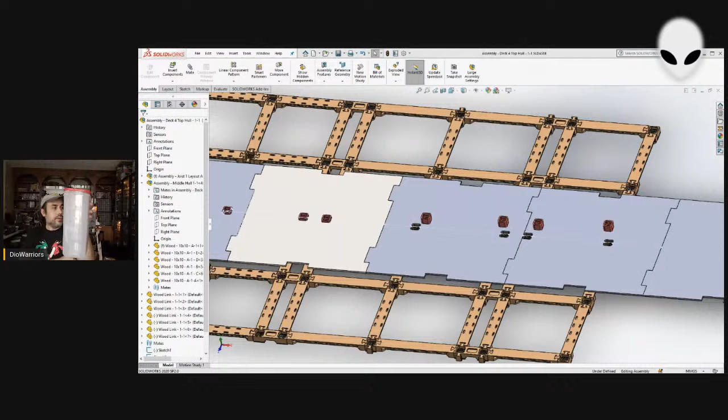But something like this will keep the filament dry from moisture, and I can use some silica gel and just keep it at the bottom. The silica gel will help keep the filament pretty much dry. And these are pretty small and slim, so they should fit right next to all my other printers without taking up a lot of space. So, anyways, that's the battle plan.

So what I'm going to do right now is work on the roof section of my VSS. This is just part of it, and once it gets to a stopping point, then I'll switch gears and work on the box. I'm not quite sure what I'll do for that box, but it should be something simple, so I'm not going to spend a lot of time on it. We'll see how it comes out.

So I'll switch windows to the VSS02. What you'll see here is going to be the joisting part. It's only half of what I have to do for the upper deck, so what you see on the screen will be for twice as long. What you see right now is only half of it.

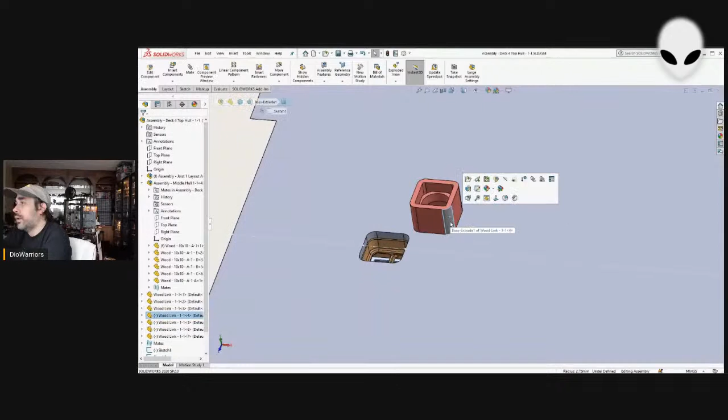So what I'm doing, basically, I'm making these square sections. They're kind of like a big peg, and they will go through the wood to anchor it to the joisting structure underneath. This is the structure underneath. All these points here is where it'll come in contact with a bulkhead.

I'm not sure about the center pieces, since I want to keep the middle parts as clear as possible. If you're curious how strong these things are, I have one segment printed.

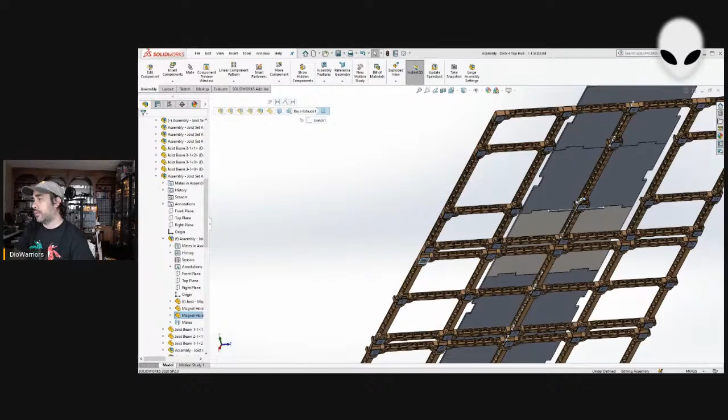Let me switch, so let's see. It's this section here. It's very tight, and there's no glue right now.

I can easily imagine when I have more than one put together, it will be quite rigid. Plus I have connection points where I can add additional structures. Either I can reinforce a wide section, or I could just attach a simple section there to reinforce this from sagging or bending if it does.

So I've got to print a whole bunch of these things, and that's what this printer is currently doing. I have it really slow, but it needs to increase speed. I'm slowly incrementing speed on that printer, mostly because it's printing directly on the build plate, and if it does it fast enough, it'll make the underside of the build plate kind of ugly.

I'll give you an example. You can see, even though it's blurry, you can see some... oh, come on, focus.

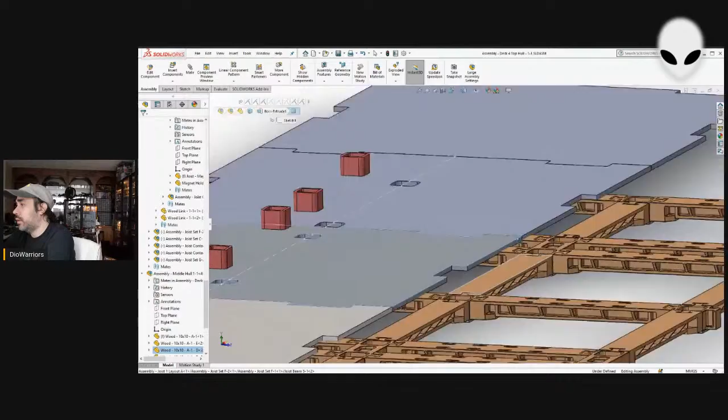And it will - I'm going to try to use. I just noticed something, oh okay, never mind. I'm going to try to use. Yeah, I wonder what's going on here. I'll figure that out later. Should be. Oh, I know why, okay.

So anyways, yeah, I'm trying not to use glue everywhere. I'm trying not to rely on it too much. What I am going to try to rely more on are things like pegs - a peg system to help keep pieces from shifting around.

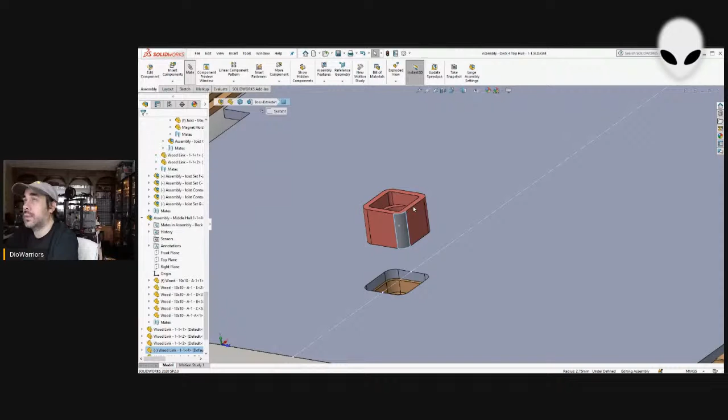And so, as you've seen me in other videos, I'm just mating these pieces together. It takes a little bit of time, but fortunately I don't have a whole lot to do before this section is finished. Just gotta do this - right now it's fairly easy.

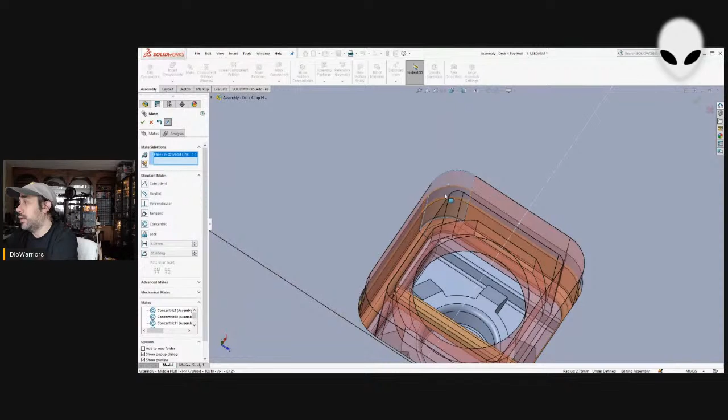I did some changes on some other parts earlier this morning and yesterday, and that took a bit of time. It was a bit frustrating at certain things too - frustrating where I make a change and it causes me to have to update a whole list of other things. Then when I update all these other things, I find that other things have been broken, so I have to go back in and reconnect those. It was just getting frustrating, but I finally got things done.

On the printers to my left, I'm working on some orders. They'll be going out tomorrow.

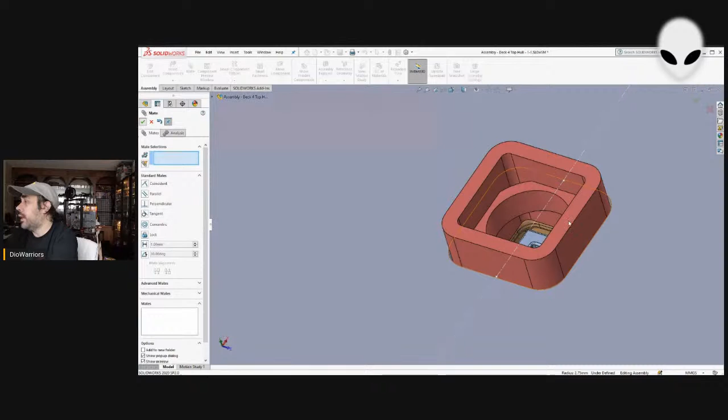So yeah, it's been raining outside, and it's been raining kind of hard.

So I have almost everything done on this. I now have to secure the bottom parts, and it gets a little bit tricky. Let me move this further up. The reason why it gets a little tricky is that there's a whole lot of details with the joisting.

There's a lot of different surfaces, and that can tax the computer as I move things around. Okay, got everything almost done, let me go back and mate. Okay, there's also a potential problem area here - I'm not too sure, and I'll tell you about that in just a moment.

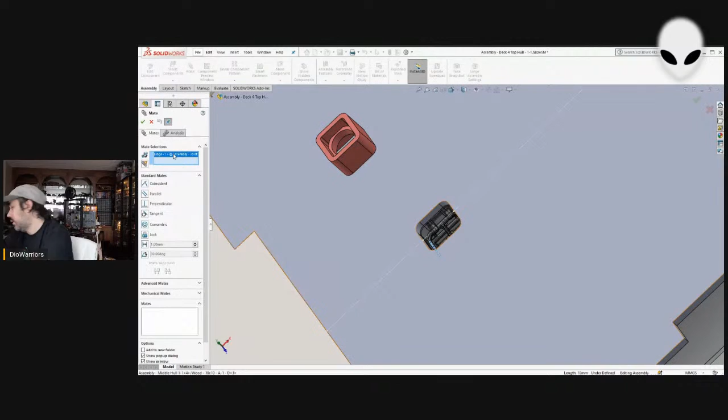This is not what I want to do like this. This to here. Okay.

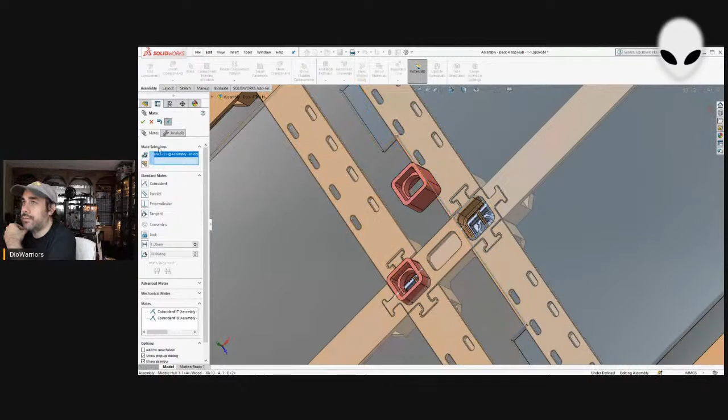This side to inside here. And this is the problem area. It's just so close to the edge of the wood here. I might make an alteration between this piece of wood and this piece of wood.

For example, maybe I need to remove this section, this tab-like section here, maybe reduce it or something. Anyway, it's so close to the edge, it's only 0.33 millimeters spacing, which is basically nothing.

So it has the potential of breaking. So I'm going to try to remedy that.

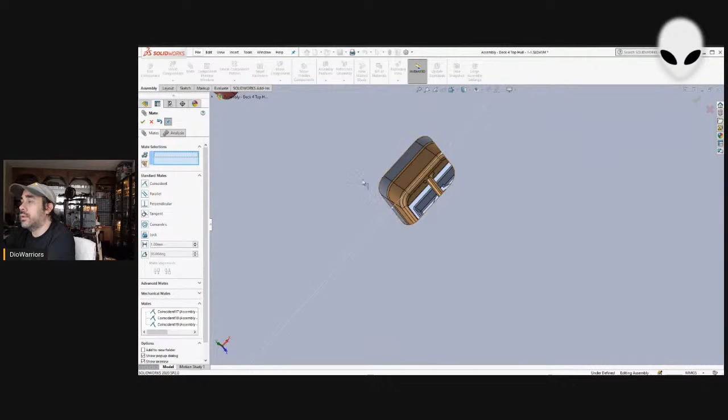This is only one layer of wood. All this gray, or actually this color tan, it's only a thin piece of wood. So I'm thinking of putting other pieces to kind of stagger them and reinforce the seams.

But you know, all that adds weight, and when you put multiple pieces of wood, it's going to get heavier. So I have to make certain pieces stronger, and that increases the chance of sagging, things like that. So there's always this tug of war, a seesaw type of effect to balance everything.

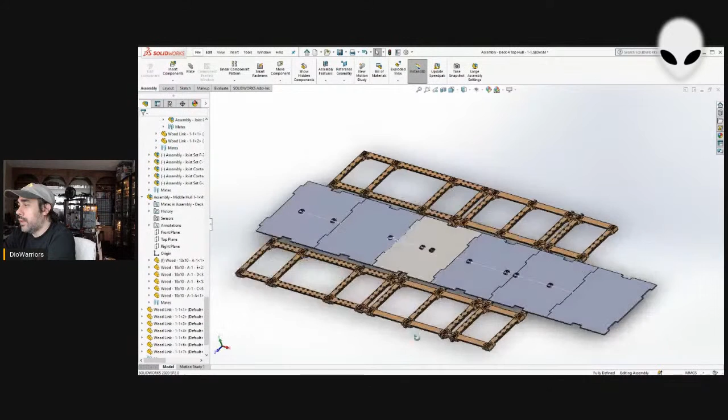Okay, I think I'm done with this part. Let me change the view.

All of these pieces have these peg holes or port holes. I need to do them for these pieces of beams, of joisting, and just that, I haven't done it.

There's a lot of stuff I got to print. What you see here, these smaller pieces, is the stuff I have already printed. So I got to do a bunch of these.

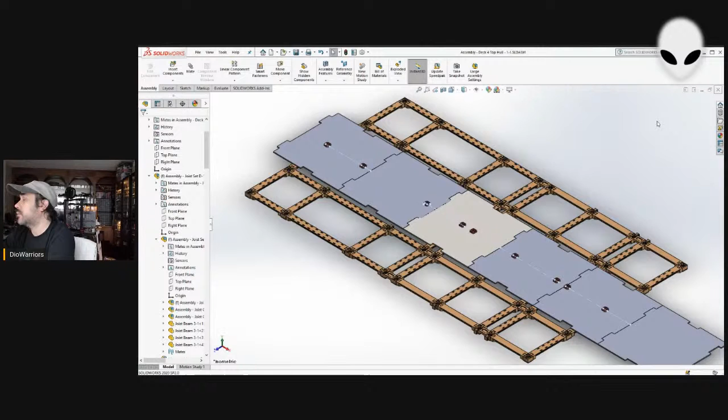So let me go back and get into a nice view so I can save it. Save. And just wait for the thing to save. Okay, and I can close this. Come on, close. Okay, that was it, huh?

Let me also bring up something I was curious about. How come it didn't keep the color? I changed a lot of that wood showing up in gray to a tan color, like here. But for some reason it just appears gray in that other file, so I don't know why. It shouldn't have.

So okay, if you're curious to see how that ceiling looks, let me see. I'm going to go to deck 4. I'm going to take a quick look.

Deck 4 assembly top hull. Well, let's take a look at this real fast. Okay, so here, this is how it looks with the joists.

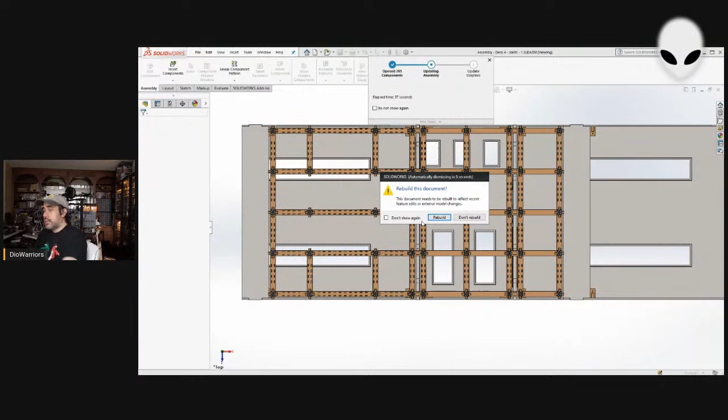Rebuild. No, almost. Well, okay, don't know why I moved things around. Oh, it's upside down. How did that get upside down?

A lot of things are. Huh, okay, I'll just delete this. I'll delete this. I don't know what these other ones are for. Anyway, so let me just rotate it.

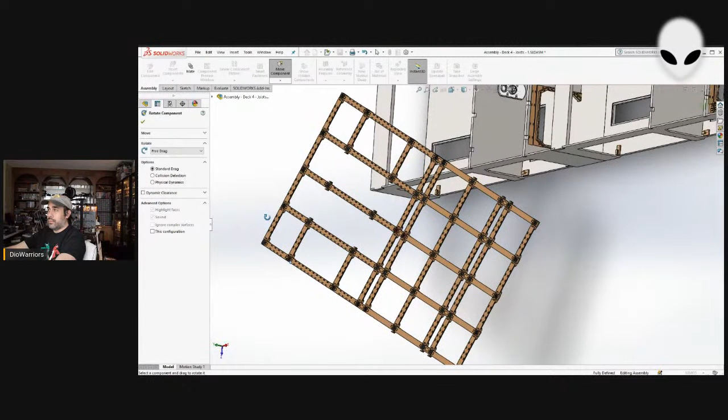It's a free rotation, so it just depends where I grab it.

That's good enough. The rest I could straighten out through the mate feature. For example, I select this surface there, and I say, okay, I want to mate.

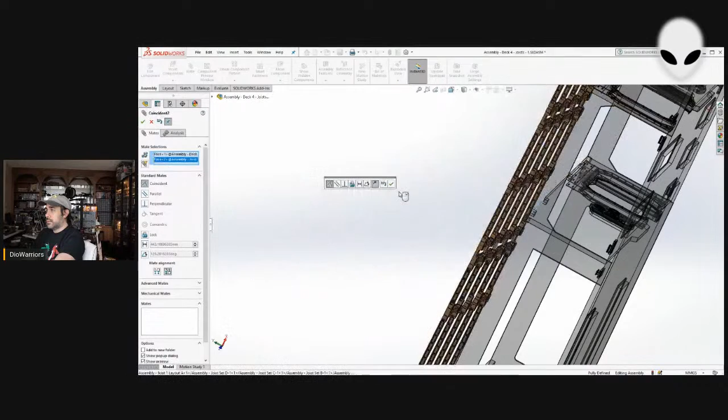Come on. So let's say right about here. Okay. Now I'm going to... oh, I kind of lost the view. Okay, better.

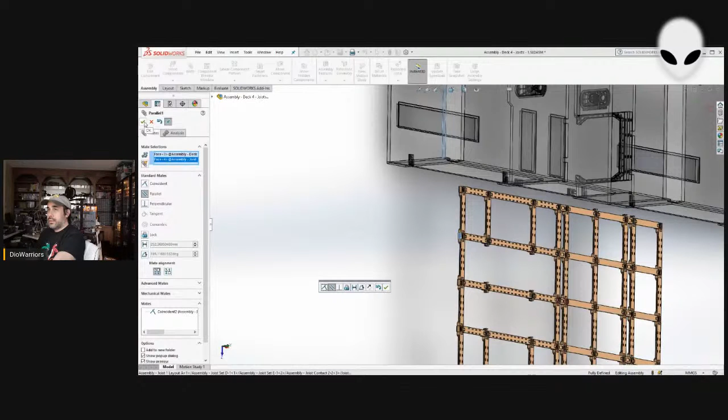All I want to do here is just make this parallel to, let's say, right about here. Okay. And top view.

So this is just a quick little layout test, nothing final. Okay, so this piece here, all this is a wall.

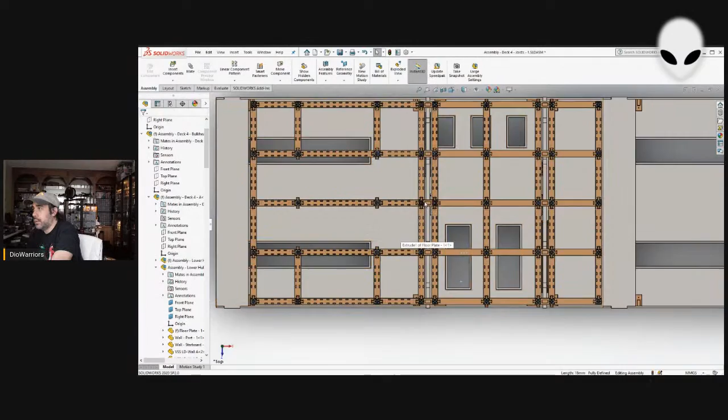So it's a vertical wall, and it's pretty strong. So the idea is I'm going to have this joisting structure resting on that wall. And I'm just going to approximate how far, so something like this. Of course, it's not quite centered or anything, but it gives an idea.

So on this structure here, there's going to be, as you know, the ceiling is going to be on this. It's going to extend all the way to the engine room area. It's going to have another joisting structure over here as well. On the upper hull it's going to be reinforced, and I'll have the flight deck over on this half on top of the upper hull.

And let's see, so I need to put some more pieces in between, some more beams, joisting in between. But this should work.

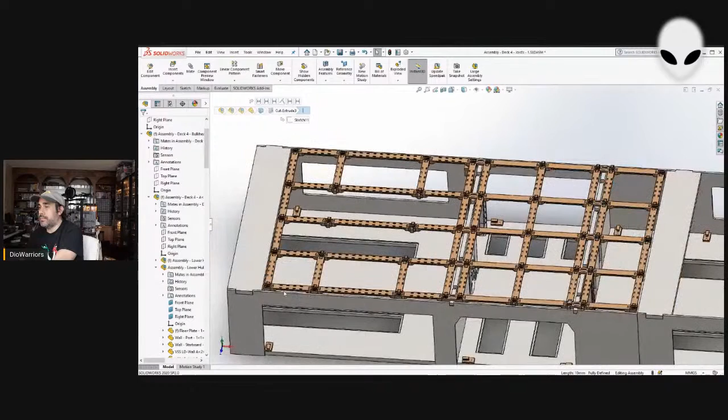This should be, so these parts here, like the corners, for example, some other areas on this side, so forth, there should be some bulkheads, and the bulkheads should lock into these bottom structures here.

And so the idea is all this joisting is going to be resting on top of a bulkhead. So the bulkhead is going to take the role of a pillar and support the ceiling.

So I'm hoping this should be easy for me to remove the ceiling and access the interior. Plus, I should be able to hang things from the ceiling, such as lights and other structures. And of course, I have other ideas for on top of the ceiling. I'm going to try to match the engine room with the outside, having some joisting as well.

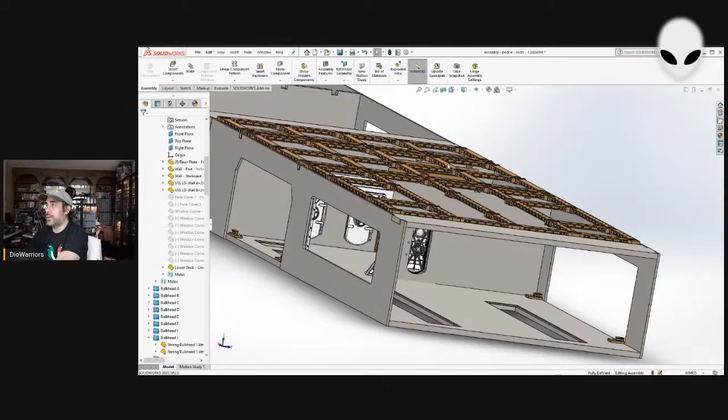So with this, I'm going to go ahead and save the work here. Let me change the view. Okay, save this. Rebuild and save the document. Yes, okay.

Sometimes it takes a while to save, it just depends. I could try to cut down on some of these files from getting too long by removing the inside things like the watertight doors. They're not being used right now, they're just to show how things would look. But anyway, I'm closing this file.

So one of the prints has just finished. Let me change the item here and start another print. Come on... wow, this one's really stuck. This piece is proving to be difficult to take out. I don't know why, it shouldn't be. Wow, what's going on with this one?

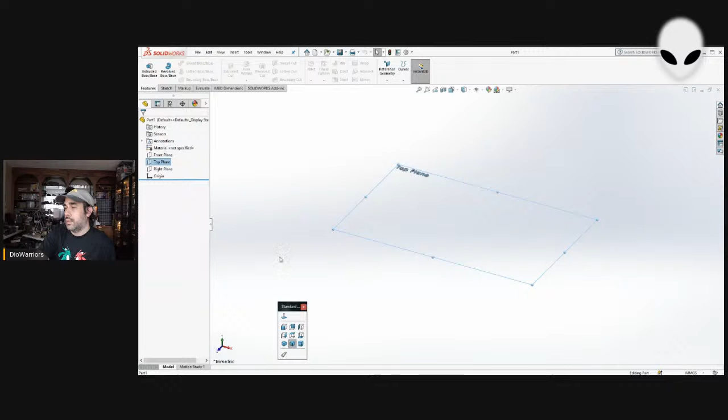So let's say about 190 millimeters long. So this is how we start a brand new project. Choose the top plane, go to sketch. Choose 190. Okay, grab it in the middle, and I'm going to move it to the center of the screen. Okay, right there, that's called the origin.

What's the approximate width? About 75. It kind of bulges in the middle to about 80. So 75 and 80, let's just say 80. And at the smallest, it's about 50.

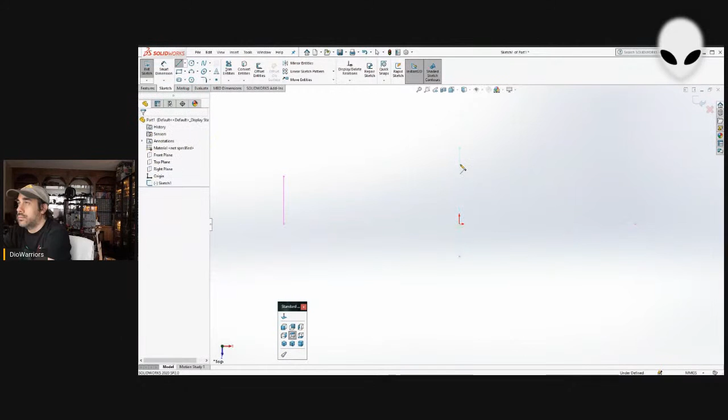So let's say, how am I going to do this? Let's do one side, this is all approximation right now. Let's make half of this, half of 50, and half of 80. And let's see how far before it starts to turn. So I'm just guessing right now, it's just all approximation. So let's say 20 millimeters in, it starts to... let's say 20. So let's see.

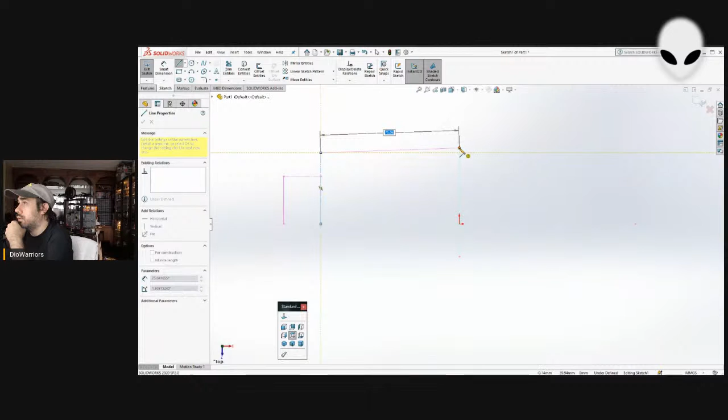Sorry, wrong thing. So let's make this one 37.5. And I'm expecting a phone call, so let's see if anyone calls. So let's see how this is going to look. Doesn't quite look the way I was hoping it would look. Let's just do this, this is a fun little experiment. Let's see, okay.

I just want to make this rounded a little bit. Close enough, I think. Let me just... okay, let me accept it. Accept it. I don't want to get rid of it, I just want to kind of... nah, not quite what I'm thinking.

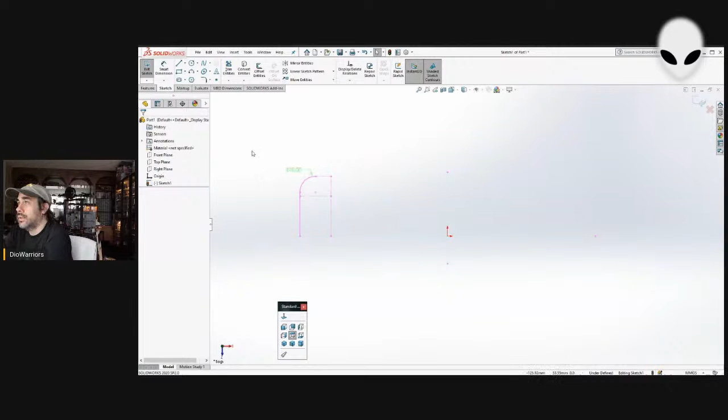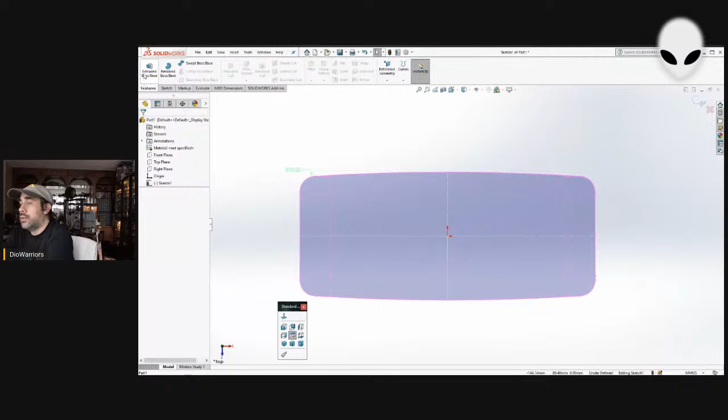But let's do this. Let's take this and mirror all of this about here. Then let's take this right there, something like that. And then let's mirror the entire thing, something like this. And the wood itself is about 3 millimeters thick, so just 3.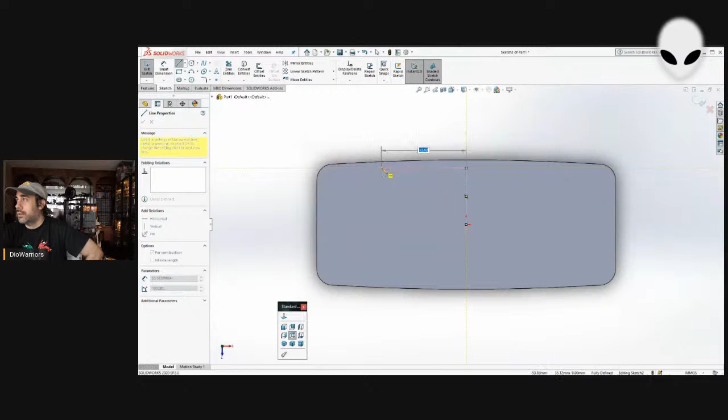So what I'll do is, let's go 35, half. And let's do a center line. Let's say... okay. So this is about 200 millimeters long. So if I could keep the middle about 100, so the middle here, from here to here, is about 100 millimeters long.

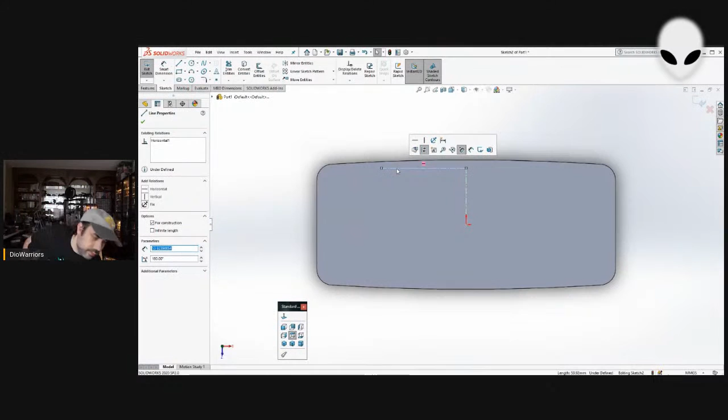Yeah, so it's about 200 millimeters diameter, about 100 millimeters radius. So let's say this one is 50. And let's make an offset of 3. Center line. Basically, I'm making a port, I'm making an area where I can plug in a piece.

I want the center line here. Why? Because I like to do things with the offset command. So I'm going to say 10. Offset 10 in one direction, 10 in the other direction. Yeah, something like this. So trim.

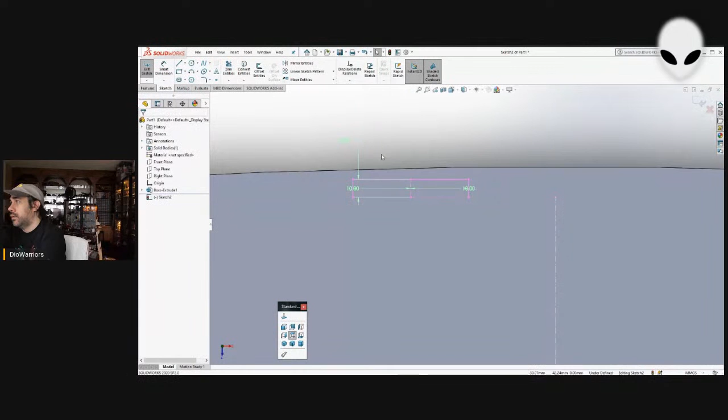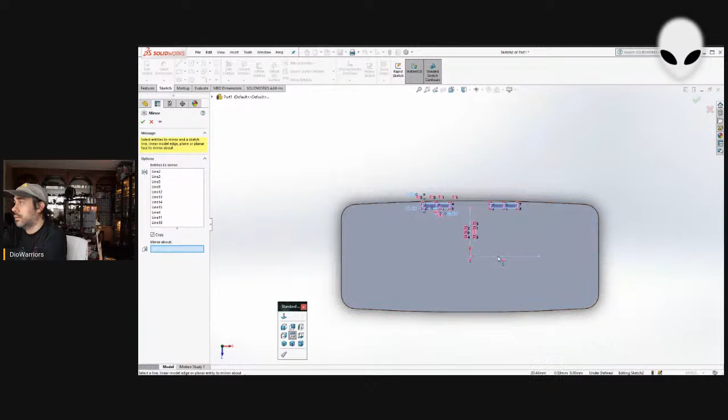Okay, what I'm going to do is mirror this. And I'm going to mirror this again. Let's see. Mirror. Okay, I'm going to cut this, extrude a cut. Cut it to this side here.

Now I'm going to go ahead and save this file, save as. Let me... I think I have it under, what is it, miscellaneous? Maybe under... no. Maybe look to see where I have it. Let me see. It's not one to one. Yeah, maybe. Yeah, it is under one to one directory.

So, oh, file, save as. Right. One to one, tools. Okay, several tools. Things for printers. Tube holder. Oh, that tube holder, sorry. I don't know, I'm just gonna make another one.

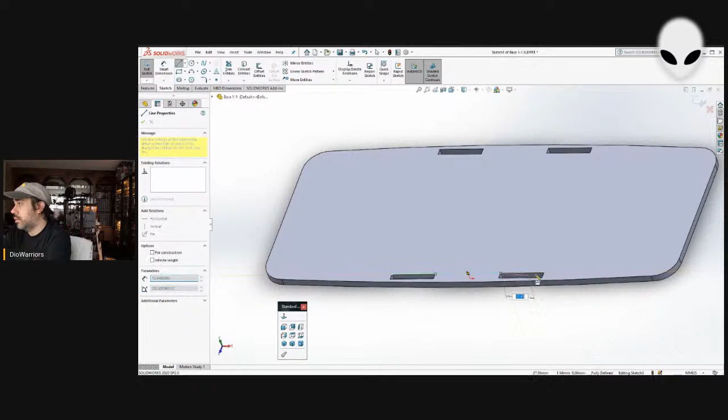Now I'm going to make another part here. Sketch. Let's say line, I'm going to go here to here. Okay, I'm going to go to front view. I want to be able to see what I'm doing. Right there.

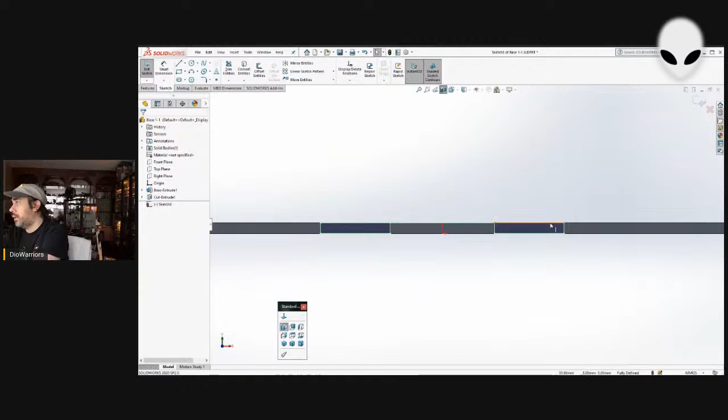Okay, so let's see. Basically, I'm making a tab. I don't need this piece. Don't need that. Center line. How tall do I need to make this? The spool itself is 200 millimeters wide - so if you make this one, not wide sorry, long, so it's a diameter of 200. So let's just make this one 210.

So there's a little bit. See, what I'm concerned is, I don't want to have too much on the top. So anyway, let's see.

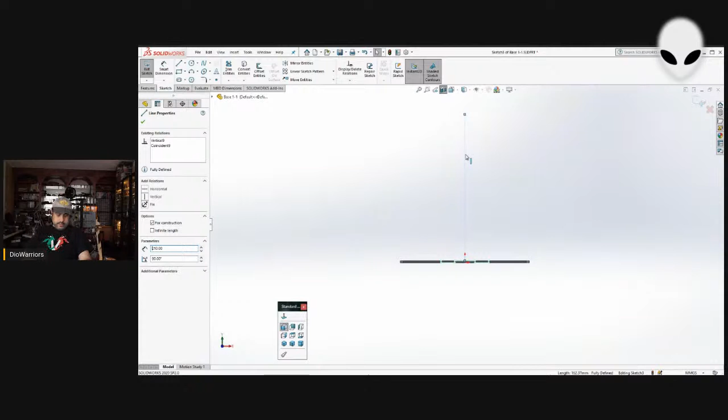So that thing, actually, I should probably use like - okay, let's do this, let's make this one a space of 5 millimeters at the bottom clearance. Then about 100 would be the center. So if I go up 100 from here...

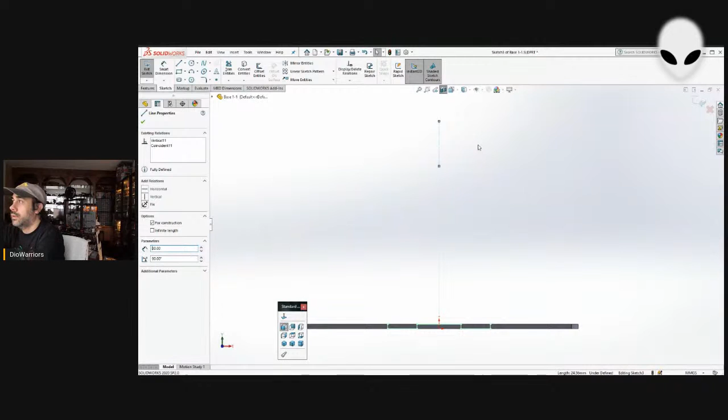Oh, that's the center of where the spool should be. Yep. It was almost 30 millimeters. Let's see. So if I do like another 30, so I guess that, well let's see. Yeah, it's about 30 in the center. It almost doesn't look right.

So let's see, if this is about a 200 millimeter piece, so let's say 100 millimeter diameter, and the center part was, it had a radius of 50, so that's 100. So this is a diameter of 50 right here, radius.

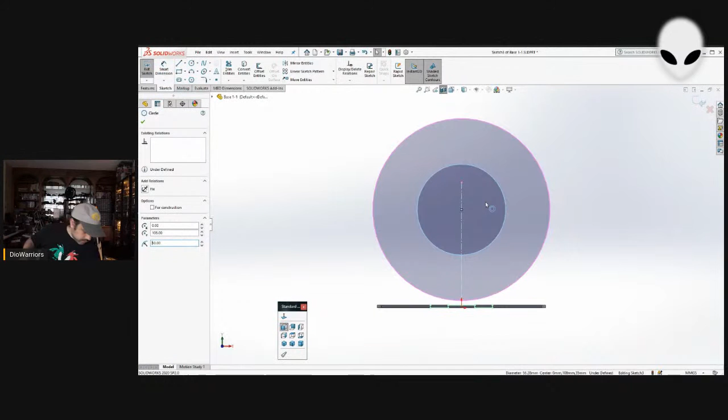Let me see. So this one is about 50, 50, yeah, 55, 55 millimeters. So the next one would be - so that'll be 55, but I'll just do it like that right now.

I'm just thinking. So let's see. Let's see, I'm going to have an axle. So if I make an axle, there's 20 millimeters. It's a radius, so yeah, 20 - yeah, 20 millimeters diameter.

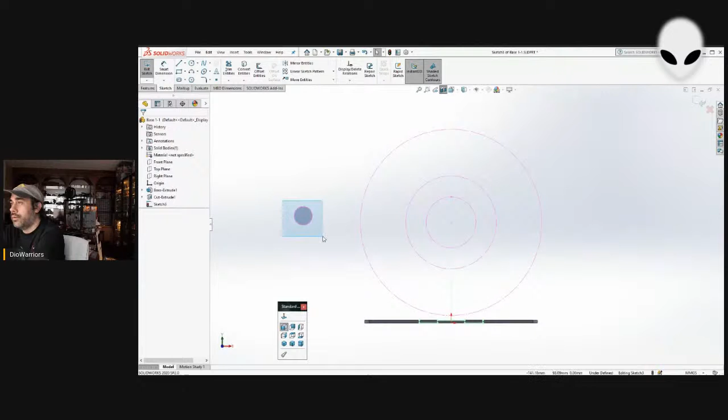Let me do this, center line. I'm going to connect it right here. Take this, grab it to there. So what I'm thinking of doing is, actually, I could do this. Watch, watch, watch. No, this is fine, okay.

So what I'm thinking of doing right here is, I could do an offset. Make a little bit more. Let's say 10.5. Yeah.

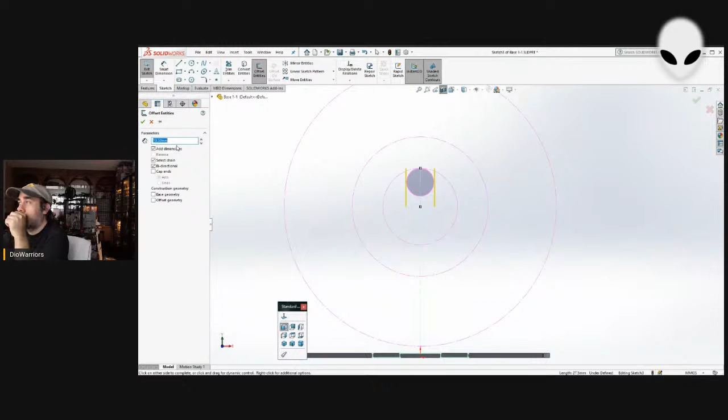I'm just thinking, how well does 3D printed plastic and plastic rub against wood? I don't have any wood here, I don't have that kind of wood. Yeah. So pieces of plastic - it should be okay.

So let's say I do right here. So basically I'm thinking of... let's see. Let's do it right like that. I'm going to cut the length. So basically what I'm thinking of doing is have like a wall where...

Let me do this real fast - a wall, basically. So I'm thinking like this, so I have like a wall, and I put the axle in between, and so that way I could, when I need to remove the spool from the box, I just pull up the whole thing, spool the axle and everything, leaving this frame thing inside.

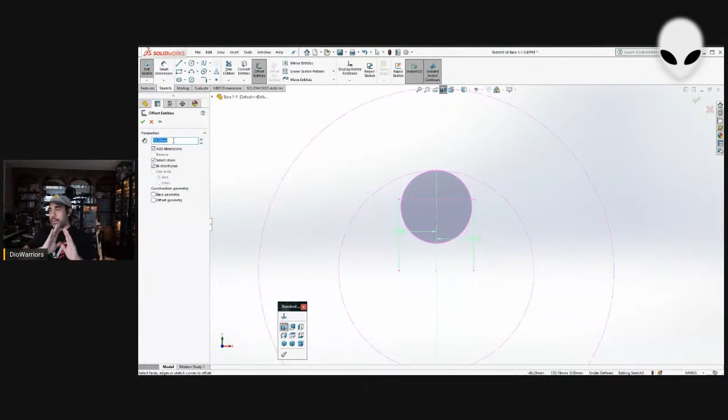Am I making sense? I'm sorry, I have a whole bunch of thoughts in my mind right now, and I'm waiting for a phone call, waiting for a repair guy for the AC to give me a call back. If not, I'll just have to call tomorrow.

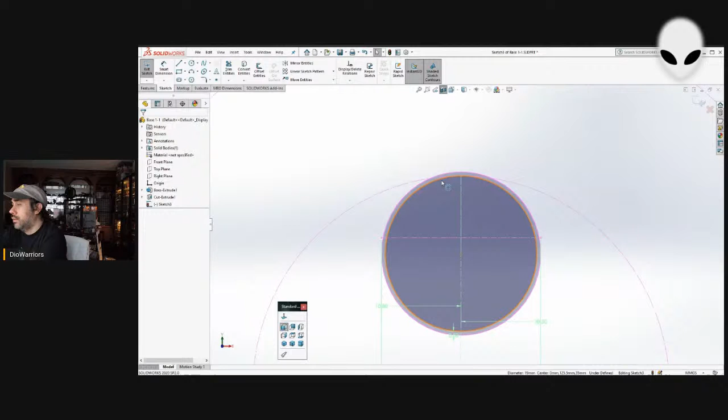So, anyways, so let me do an offset. Yeah, something like that. This, I'm gonna trim this up, trim this around. What's going on? I don't need that. So this is what I was working with - construction line. Okay, I'm gonna trim this.

And trim this down here. Do another offset right here. If I make this one 100, that's not quite what I want. Let's just do it right here from the tab.

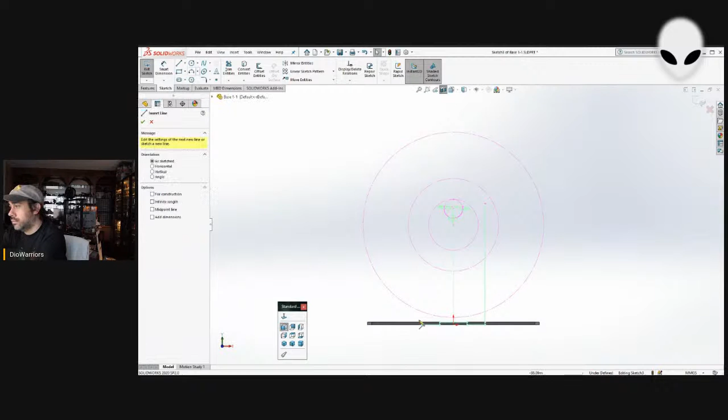Okay, trim this. Oh, sorry, I messed up right here. And up here.

Sometimes when I do these videos, I don't know what I'm planning to do. I just try something and start doing it. Sometimes I don't have a set plan.

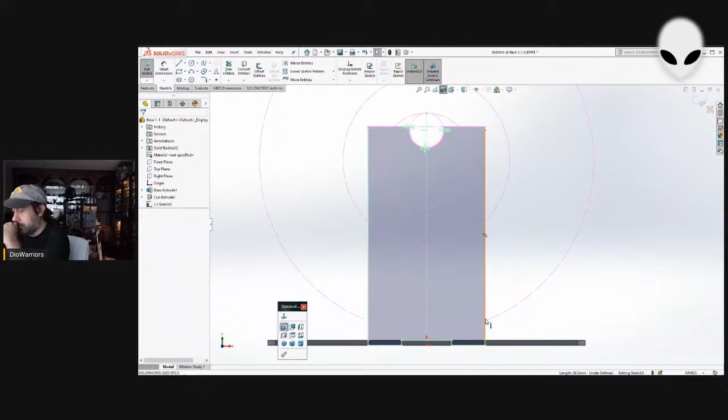This should be good enough for now. If I need to improve the design later, I'll come back to it. So let me go ahead and copy the whole thing. Copy.

And go ahead and save that. File, new part. Put name. Sketch, paste.

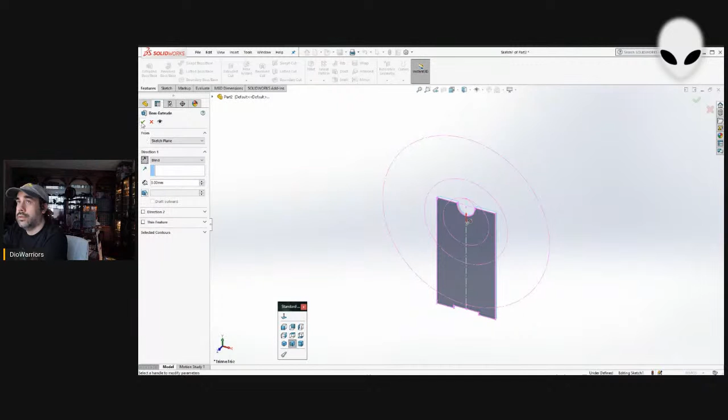And make this 3mm because this is going to be wood. 3mm. Let it go in that direction. File, save.

Save as. What do I call this? Wall, maybe? Base, wall, or just call it side. Just side.

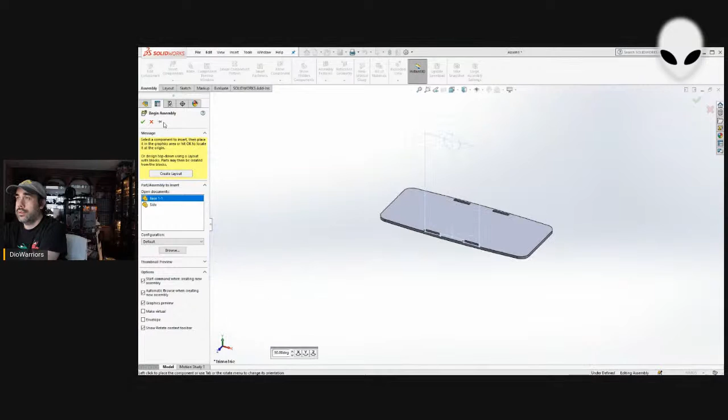And so this is the idea. Although I'm seeing some potential of something else, but so I go new, assembly, base. Okay, just stick that there. Let's go to view, hide, show, and just go hide the sketch lines.

And then let's go back to insert components, side here. Also go back to insert components, put the side again on the other side. So then let's go to mate.

We're gonna make this to here. This here. This side to this inside. Same thing with this one. Here.

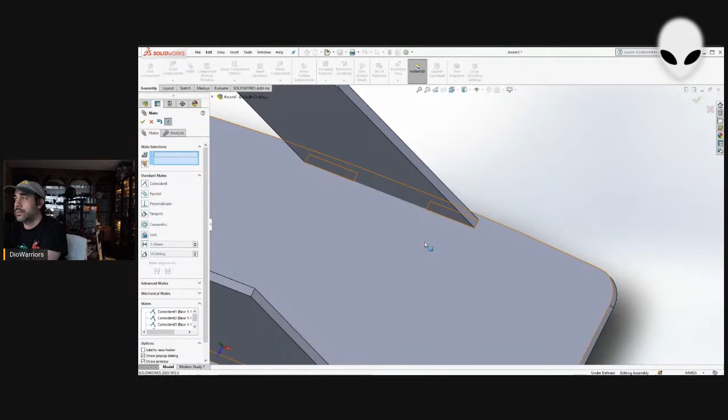Then make this here. Like that. Here. Okay, so...

A very simple stand. Then next would be to make the axle part. How am I going to do this? Let's see. So let me save this. Save.

Assembly. Spool holder. Frame. Let's say version 1 kind of thing. So that.

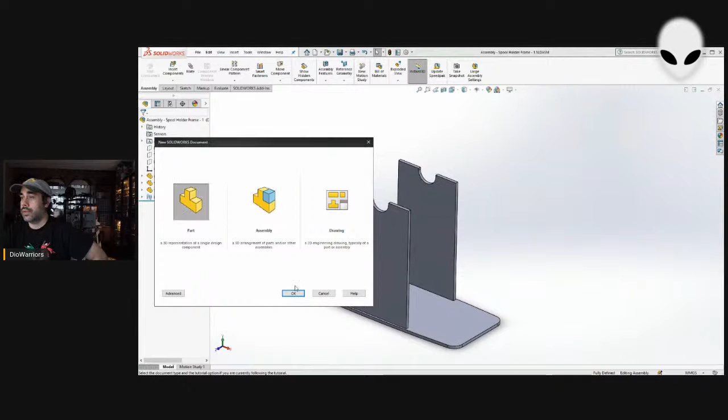So we said this was the axle was going to be a diameter of 20. So SolidWorks likes to show the radius, so we're going to make the radius 10.

So select front view, sketch, circle, 10.

I'm going to do an offset because I don't want the thing to be solid, so I'm going to make it just 1.5 millimeters thick. I want bidirectional, reverse. Yeah.

How long do we want this thing to be? It was 80 from point to point. Let's go back to this.

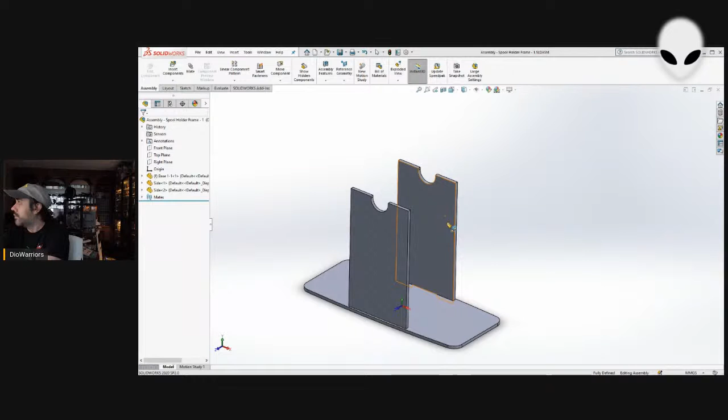One easy way is to go to tools, evaluate, measure. So, 70, 70 millimeters. Okay, be right back for a moment.

Let's see. Okay, so let's say I think that's going to be 70 millimeters. Okay, just remember that. Let me switch here.

Oh, I see people running downstairs. So it looks like I have to hurry up. I gotta run downstairs. Less than 20 minutes, less than 25 minutes.

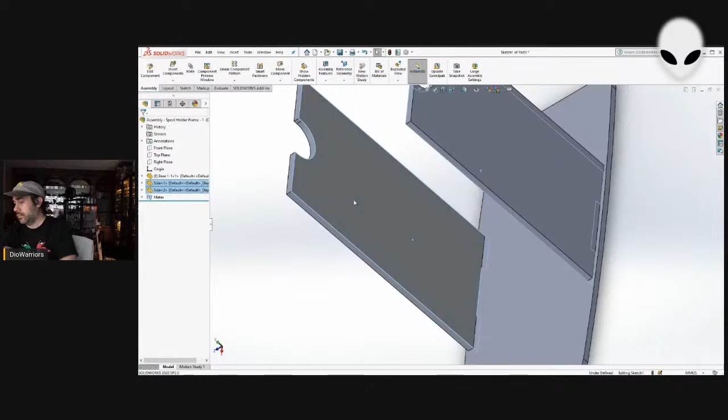Why? Because I think I want to do this. Watch. So let's get the inside diameter here. Sketch. Come on, circle.

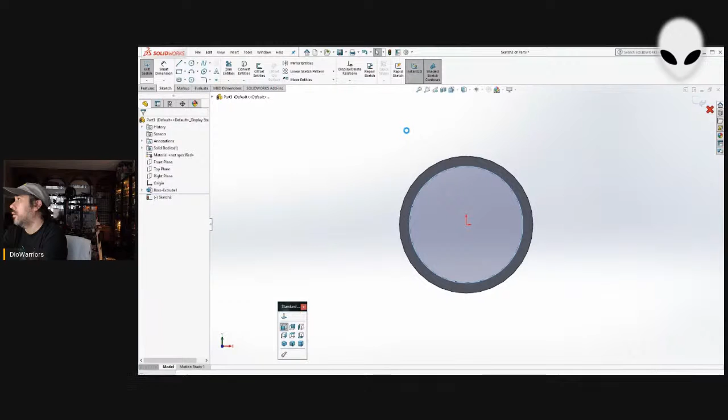Okay, I'm going to make another part. This is basically, I don't know what you call it, end caps maybe, a cap for this. Okay, so I'm going to save this. I'm just going to call it bar rather than axle. I got a reason why.

Bar one, huh? Reminds me of that chocolate bar, bar none. File new.

Sketch. Oh, sorry, I gotta select where. Okay, sketch. So paste. Offset of 0.125.

Reverse. Paste this. Okay. Make an offset of 1.5. Reverse. Okay.

Features. Extrude boss. So let's make this one. Okay, good. 10. Let's go 10.

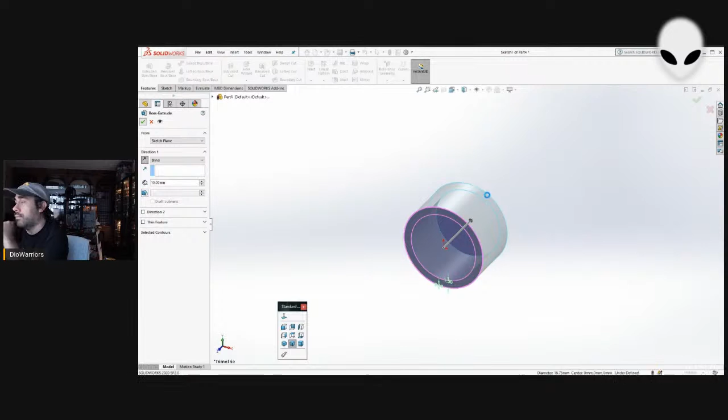I'm moving kind of quick now. Sketch. I'll grab it. Yeah, let's take the offset of this piece. Oh, come on, give me the offset.

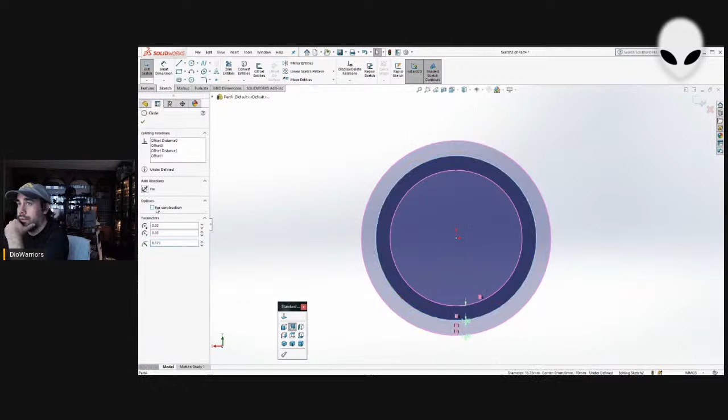Yeah, just thinking. Okay. Features. Let's say 1 millimeter, something like that.

And let's make this, let's do that again. Sketch, sketch, one circle.

Okay, let's do offset. No, not there. Let's say 2 millimeters. I think maybe 3 millimeters would be better, be wiser. Okay, and features.

How thick do we want this? Let's make this 1.5. Now, why do all of this? Well, let me do this real fast. Let me go. No...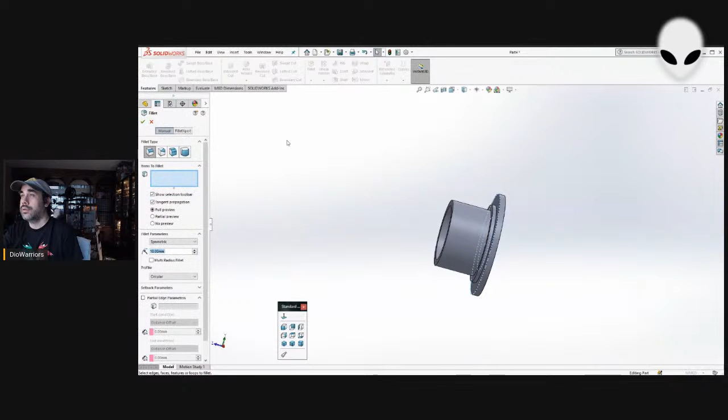0.5. And so that's good there. Let's also make this there.

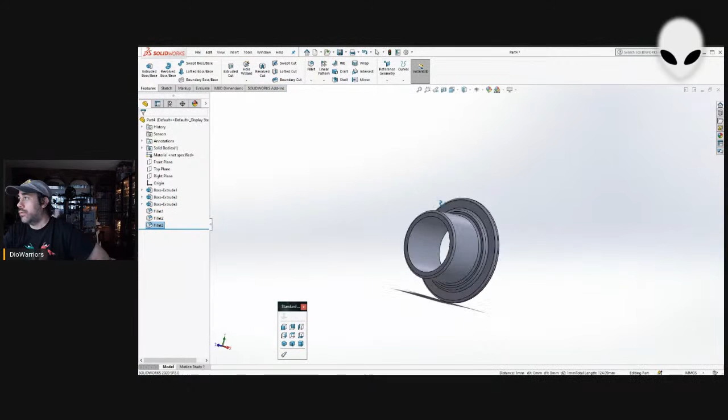Mostly I want this thing to roll and glide easily. So I'm hoping a lot of rounded corners will help it.

Okay, let's see. File, save as. I just called it cap one. Let's take this to the assembly.

So if I go, yeah, I wanted to do a laser cut, but I have to cut this short. So, insert components. Oh, come on, insert components. R.

Let me do something real fast, make it easier to look. Side material. I don't like the color of wood on this thing, so I like to go plain carbon steel for this kind of a brownish look to it.

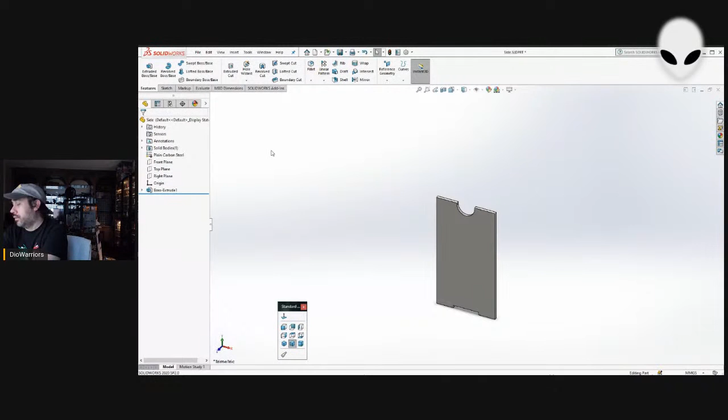So save this. Base material also plain carbon steel. Save.

So this is in gray, so we take insert components, cap, insert components, cap. Let's go rotate this.

I'm gonna make this here, here, here, here.

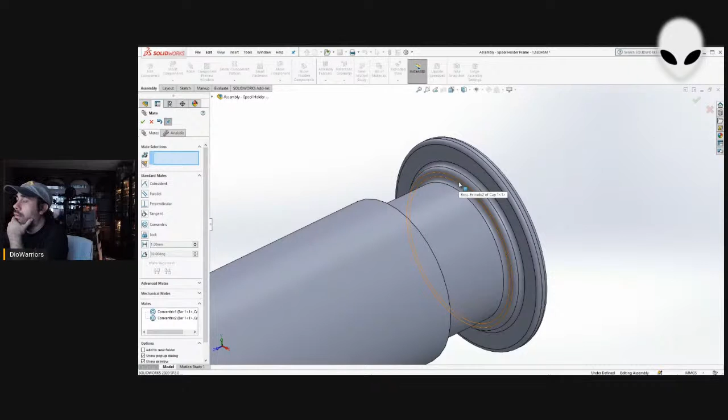Okay, and let's see how far can we make this thing go. Well, maybe that's what I wanted to do. So I should make this one to like 3.5. So make this to here.

Okay, there's a little space. Actually, maybe I don't have to do anything. Maybe this is enough.

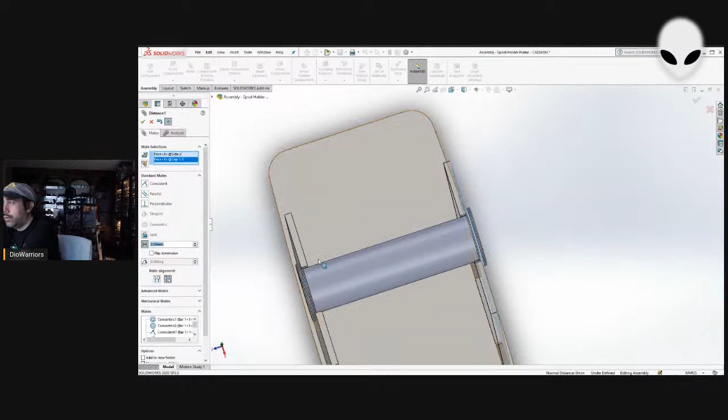So we take this, right there, and say this to this side. Let's say this has a little spacing of about 0.5 millimeter, so it should be kind of tight. This doesn't have to rotate, it just has to be in position, so the spool could be put there.

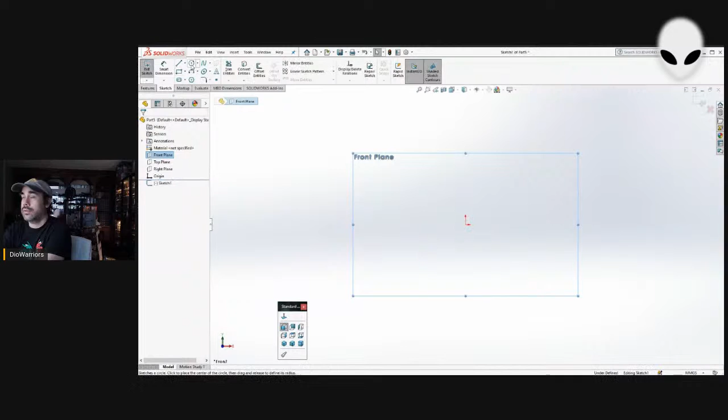Can make a very quick spool just to illustrate. Save the whole thing here. So if I go new parts - do you remember those dimensions? I think the inner circle was 30. So select this, sketch, sketch. I'm trying to hurry up right now. What diameter, 30 I think it was. No, it was 27.5.

It was a radius, 27.5 I think. Gotta do it again. So about 27.5 the radius. Then it was about 100, so that this would have to be - well actually that's just the inside part, so I can actually make this any size. Let's just look at this - it's about 4 millimeters thick, so an offset of 4.

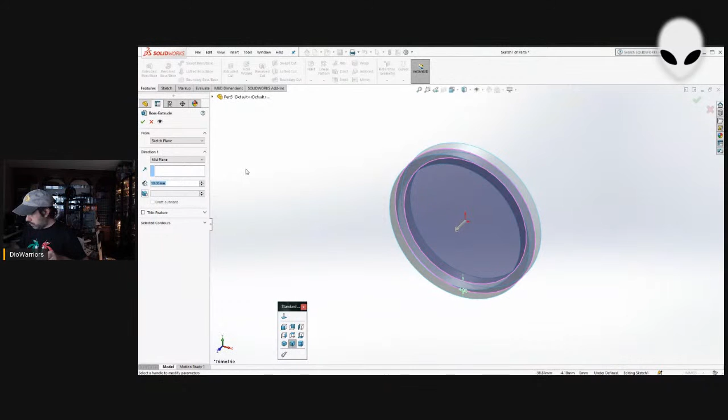Features, extrude, mid plane. This one's about - let me quickly bring up a calculator, I'm not thinking too well right now. 22.5. So 22.5, boom.

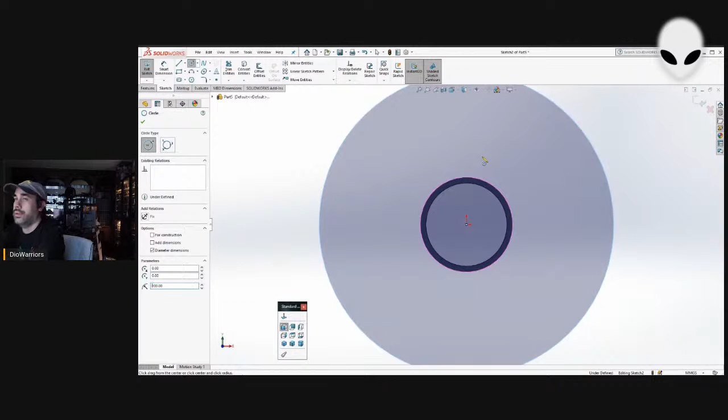Okay, so then right here, let's go to there. Sketch, sketch. So I can start this one right there. Make this one 100, so it's 200 - maybe 50, I don't want 50, 100, okay. Features again, 4 millimeters. Go this direction - no actually it should be this direction. But yeah, I see a little problem. Delete that. Good.

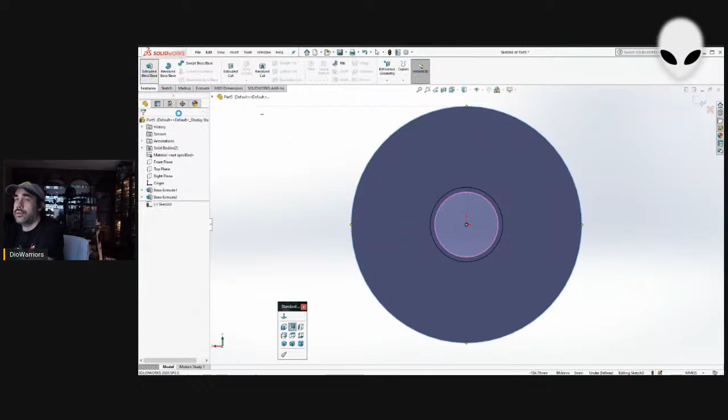So let's go to here, go to this side, there, let's go sketch, sketch, circle, inside, and there. Features, make it 4 millimeters. Okay, doesn't quite look - oh you know what, I wasn't thinking. So that's good, but let's make this - yeah I wasn't thinking, this should be 45.

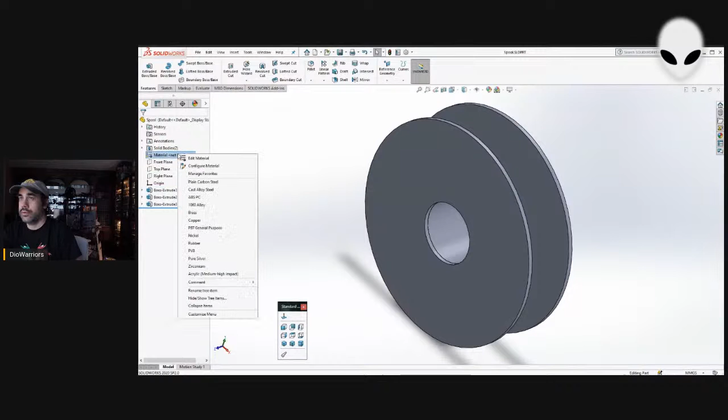Okay, so this is going to be the spool. Files, save as. I'm going to make this acrylic. Okay, save. So I go to assembly, insert components, spool.

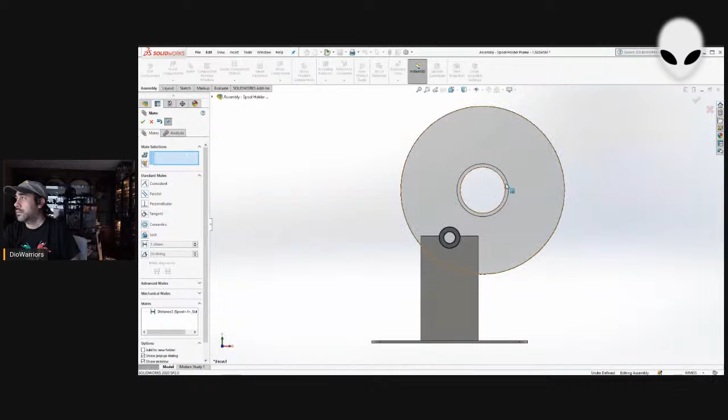Actually, how should I do this? Just going to make it right in the middle. I want this here to be about here. Let's put some distance of, let's just say 10. That's good enough. And then let's change the view - let's drag this one. So it should be something like this.

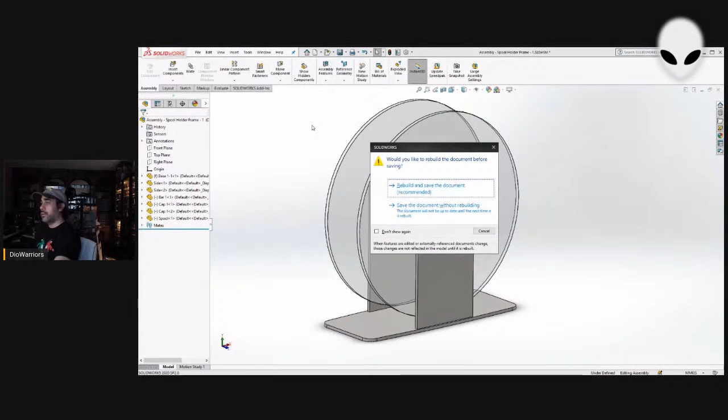So later on I wanted to do it now, but I'm going to have to change my plans and do this later. I was going to go ahead and 3D print this piece and laser cut this, and show the software, but that could be later. Let's see. Okay, anyways I am going to go ahead and save this. Save, yes, rebuild and save. And I'm going to call it for now.

Maybe I'll do another video when I get back in, or maybe later tonight or something like that. So I'm kind of in the mood to talk, and talk about everything. So I'm just in the mood to talk I guess. Computer, turn on Joe Room light.

Just to recap, I just did some stuff in SolidWorks for the VSS, making a spool holder for the inside of one of these Rubbermaid boxes. That way I can keep some of the special filaments that I use, and keep moisture and stuff out. It's a good starting point for making that little stand, just a good starting point for that box. But to do it right, I need to put a little chamber or something to keep silica gel separated so it doesn't come in contact with the spool and anything like that.